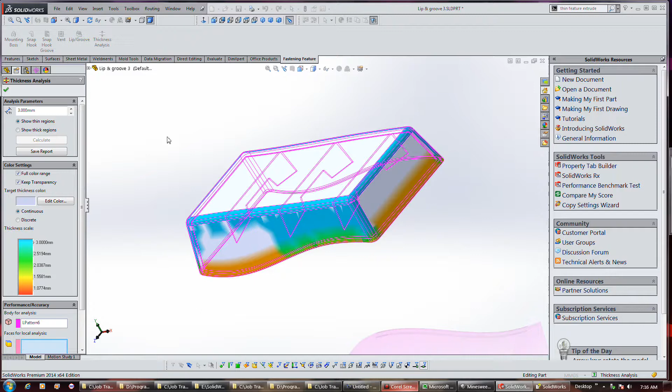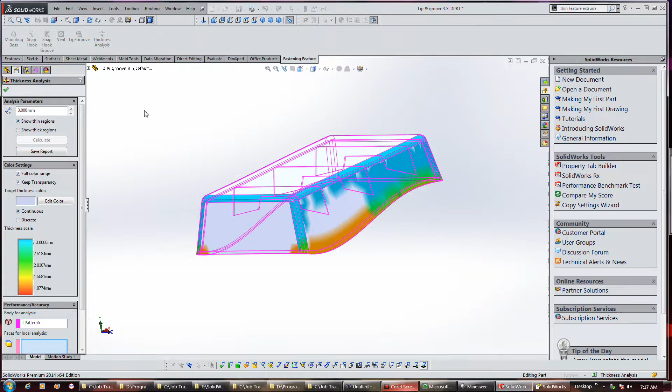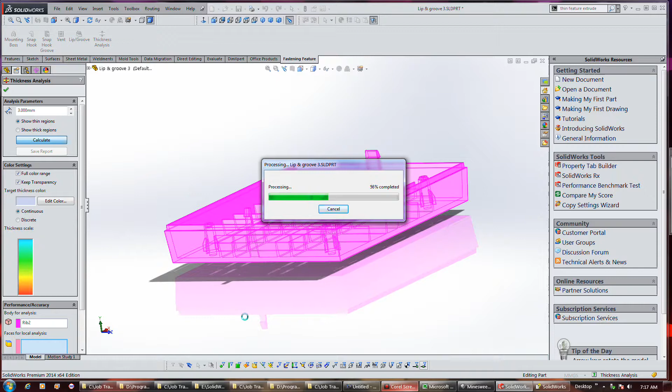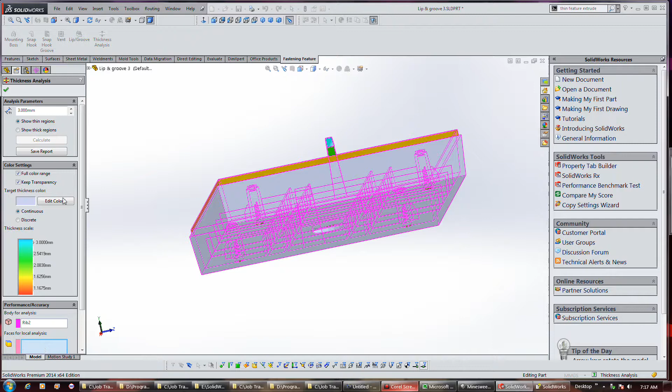I wanted to show you this thickness analysis. This is pretty interesting - it shows you the deviation and variation of thickness, which is a pretty good variation, from 1 millimeter down to up to 3 millimeters. It's interesting, I was rather surprised by that. I don't know if we have the thickness analysis over here - I think you can only evaluate one part at a time, but calculate it. Of course, some of these parts ought to be really thick, particularly some of these bosses. You can see kind of the deviation, but it's faces for local analysis, etc. Anyway, that's kind of cool.

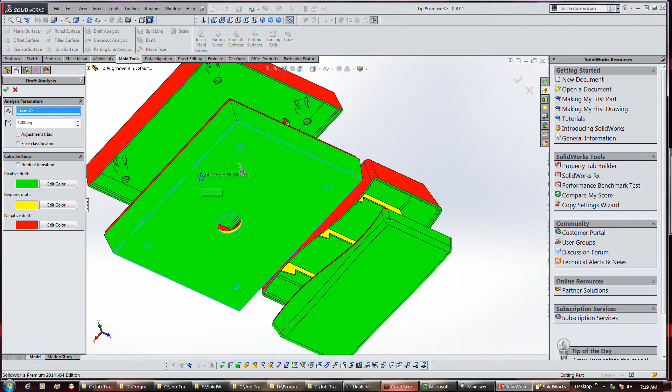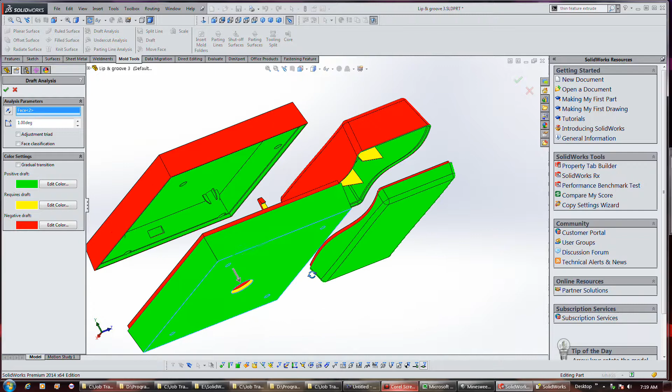Okay, now I'm doing a draft analysis, which can be found in the mold tools. When I set my pull direction, I selected the surface to be the bottom. Yellow means that it's neutral draft - in other words, we probably need to add some draft angle to that. I set it to like 1 degree draft, but you might need more, like 3 degrees or better, if you have textured surfaces. The areas in red is actually good - that means negative draft, which is what you want from the inside of the mold, given the fact our pull direction is that direction. So it's analyzing all the parts with respect to this pull direction, so we can actually look at this. Like I said, this looks uniformly good, but we don't have any ribs in it or not.

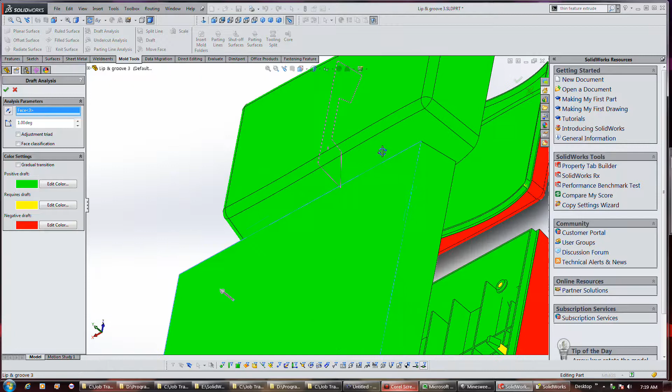And of course, these look uniformly bad, but you need to change the pull direction on it. But it doesn't look like the ribs added any draft angle on it. I thought I selected a draft angle on that - might have to go back and re-edit those. Anyway, of course our snap hooks have a problem with it, but I'm still not clear how they make snap hooks. I'd really like to know from a molding standpoint.

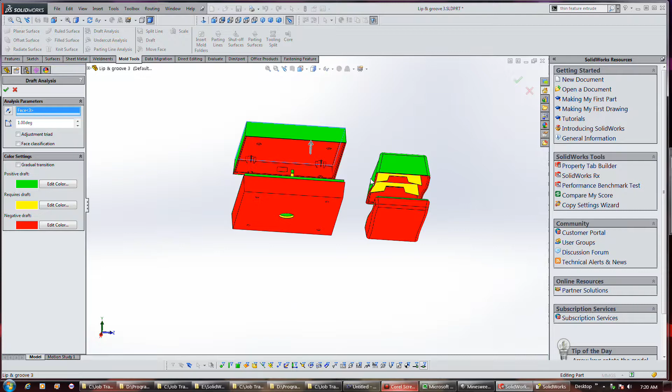Man, this sucks. Okay, hold on. Alright, I hit OK on it. I'm going to go see if we can - well, that's just a pattern. I thought that was the original. I guess it's over here.

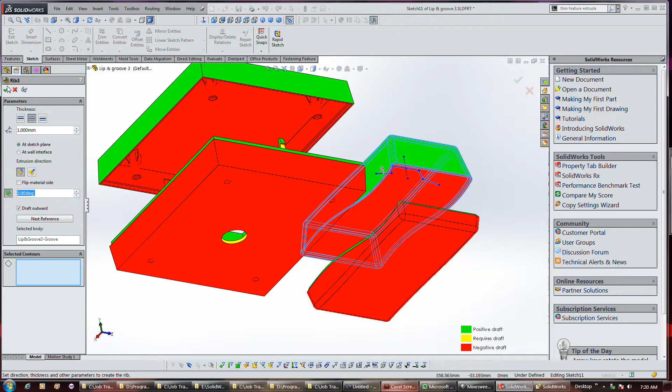Okay, let's see if we can edit this and correct that red error there. Yeah, it says 1 degree. Well, change it to 2 degrees, see if that... it should. Yeah, that fixed the problem. It was right at 1 degree - I mean, it should have been fine.

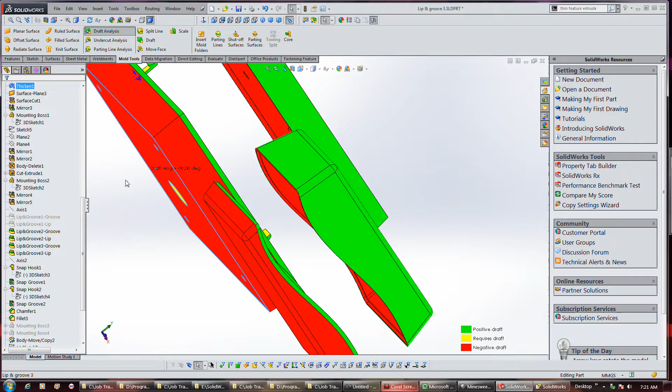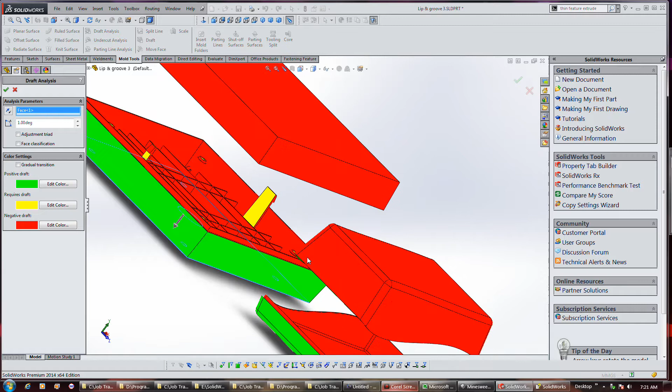So, but at any rate, this part could indeed be injection molded based on those parameters - anyway, the draft parameters, the pull directions. I'd have to go back to the draft analysis to... yeah, there we go. But like I said, you can see this has got neutral draft there and there, so that might be a bit of an issue if this were actually going to be injection molded. So anyway, just showing you a couple of tools there.